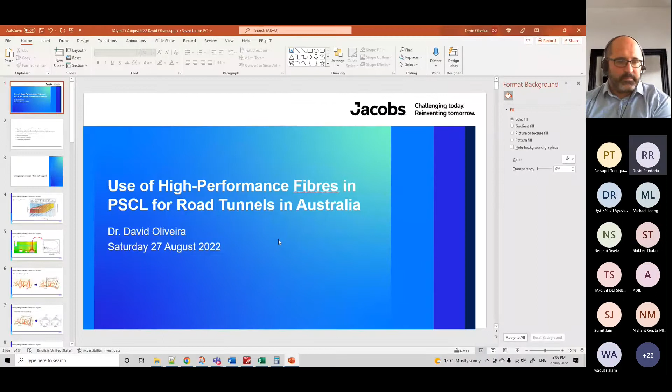So I'll just start sharing my screen here. Sure. Can everybody see the presentation? Can you confirm to me, Ruchi? Yes, it's visible. Just a small quick announcement. If anyone has any doubts or queries, kindly post it on the chat and we'll be addressing it after the webinar. Thank you. Over to you, Doctor. No, thank you very much. If you try to ask something or raise a hand, I might not be able to see because I only have one screen here. So if you hold to the end, I'm more than happy to answer. We should have enough time. I tried to make this presentation maybe only 45 minutes, so we should have another 15 minutes for any questions that you may have.

So when I was invited to present to the young members of the Tunneling Association of India, they asked me, "Can we please, David, try to find something practical, something related to a project?" And I thought I could present something that we have been developing and working on quite a bit in Australia, which is the use of high performance fibers for permanent sprayed concrete linings in road tunnels. In particular in Sydney, we have the practice to use our primary tunnel support as a permanent tunnel lining. So we wanted to develop a high quality product, and we looked at how to improve that with better fibers. What I'm going to show here is a product of research, but it has been applied in practice. I'm going to show how we developed this, and what the results and benefits are.

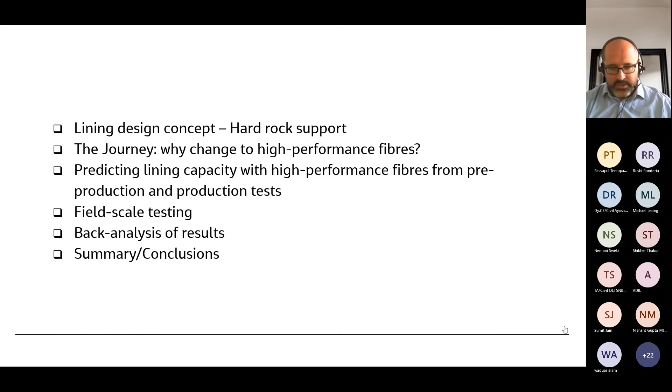So, looking first at the lining design concept, so everybody has a broad idea what we're talking about here. We will assume that the majority of people here have some tunneling background or some understanding, so I'll assume that you have an idea of some of the most basic comments. But if you don't, please just hold your question, put your question, and we'll try to answer at the end. When you talk about the design of shotcrete lining in rock, it's still today one of the most common practices, and maybe more in mining than in civil, but even in civil, to first look at empirical design.

It's a great tool, empirical design, very practical, and a great starting point, right? Here is a graph that most engineers involved in tunneling will be familiar with. It's the Q system support chart. What it tells us is if you have some good mapping and you can identify the quality of your rock by the Q index, depending on your span, you can just find in this chart what would be the practical support applicable for that tunnel, for that span, and for that rock quality.

Just for the sake of an example, let's assume that we have a rock that has a Q value of 0.4, and we are looking at a tunnel where, when I apply the ESR, which is similar to a factor of safety, say we are looking at a span close to 20 meters, which is quite a large span. But for us in Australia, it's quite a common span for road tunnels. So if you look here, 0.4 and 20, the bottom chart would be indicating that we would need a shotcrete lining that is probably closer to 150 millimeters or 15 centimeters, okay? And this would be required with a rock bolt spacing of 1.5. So that's an initial guidance.

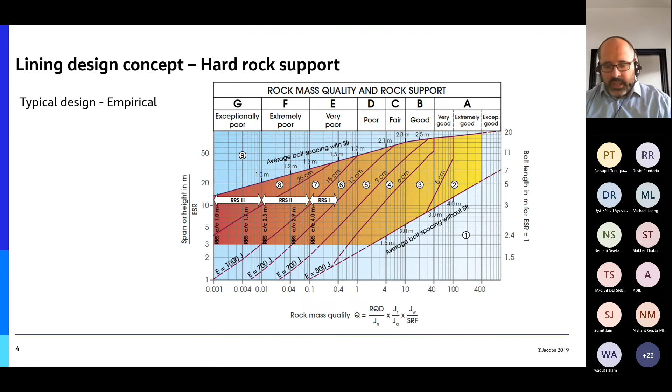So it's a good starting point, but generally it's not a method that's acceptable on its own. Great starting point, great guidance, but typically on its own it is not something that's acceptable. We still need to demonstrate from engineering principles how we design this lining. But sometimes, particularly in mining, this is the only design that's done. We want to develop that further, and we have moved a long way. So the second most common approach is to do numerical modeling, right?

With numerical modeling, you can obviously bring in some of these code aspects. So you can do a numerical analysis here. For example, this is an analysis where we have 2 tunnels beside a cavern, a quite large cavern. When you analyze these, you can extract the information from your model on how the shotcrete has been loaded, right? You extract the axial forces and the bending moments, and you can plot them in a chart where you apply your local standards, reduction factors, and load factors, and you see if your loads are within the capacity of your shotcrete or your sprayed concrete.

For example, here we see that there would be minor points exceeding the plain shotcrete curve, but it's all inside the capacity of a fiber reinforced shotcrete. So in principle this would satisfy code requirements, because you'll be applying reduction factors and load factors that will be defined in your code. And from these, you can also extrapolate other structural requirements. The disadvantage here is that

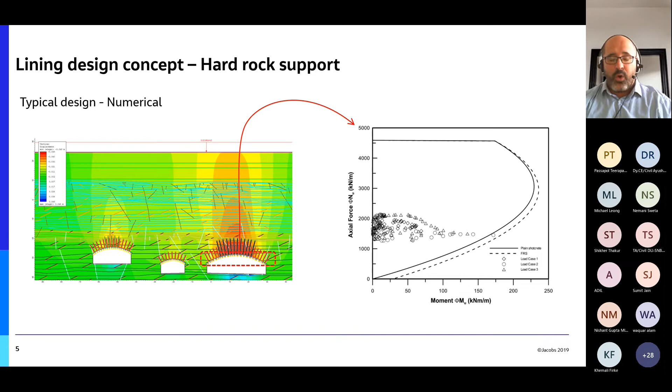I want to develop now a simple model that represents how the shotcrete performs in a tunnel, in a hard rock tunnel, where the shotcrete is supported or it works in combination with rock bolts. So let's move on and have a look at what it means.

So when we think about hard rock tunnel support, the first question that we have to ask ourselves for any support development is, what are we designing against? What are the failure mechanisms that I want to look at? There might be many, but we will look here at the failure mechanism of the shotcrete alone in this particular case.

Okay, so when you're looking at a hard rock tunnel, obviously we are worried about the global stability of the tunnel and also the stability of individual rock blocks or rock wedges that are developed around your opening. So here's an example. If we open a tunnel here, we're only showing a portion of the tunnel, say a portion of the crown or the roof. And if you do nothing, you'd have wedges falling out.

If one wedge falls out, it might actually bring further failures, because you'll be starting to unconfine other wedges that were not originally confined. So for example, here, if wedges F and C fall out of your crown, then you might start destabilizing wedges A and B, which will fall out, and then consequently E and D. And this could actually progress to a larger failure. So you want to make this stable.

How we do this in rock tunneling is, for this type of failure, we would generally add rock bolts, right? So we would be adding rock bolts here that will be tying wedge F back to better rock, and we'll be adding a rock bolt through wedge C, which will be holding it back. Okay, now you could ask me, okay David, we stabilize F and C, right? And we put them at a certain spacing, for example the spacing that was recommended by the Q chart, the Q system support, say 1.5 meters as per my example.

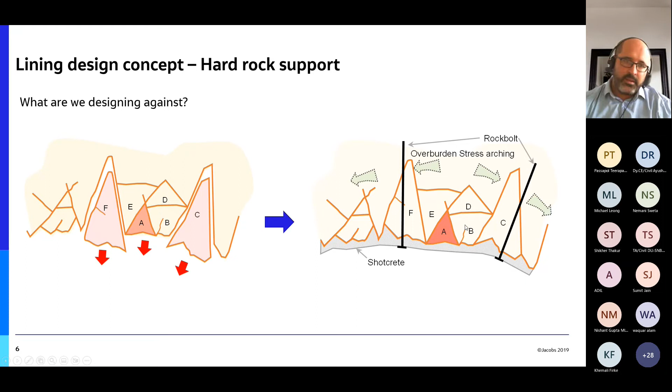So if we move along now, okay, now I know what I have to design for, but how do we design against this? And we start to look at similarities of how this system is working. If we think here that this system looks very similar to a slab on columns, so essentially I have here rock bolts that work as concrete columns, like in a building, right? And I have a shotcrete here that works like a slab in a building. So it's just upside down in comparison to this side here.

When we look at how to design against this, we can use simplified methods, right? And one of the simplest methods that's actually present in many structural codes is what we call the direct design method. The direct design method is very simple. Actually, if I go back here, it assumes that this slab, or the shotcrete between the bolts, is simply supported on both ends. So you can calculate it as a simply supported beam. But recognizing that it's not really simply supported, it is continuous.

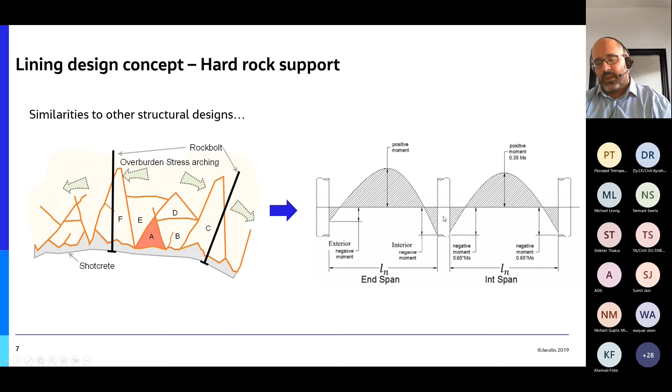And this method was very simply addressed and presented in a paper that we use very often here for design, which was presented by Barrett and McCreath. This paper was published in 1995. I forgot to put the reference here, but I'm more than happy, if anyone later wants to contact me to know what the reference is, to provide it. It's a very simple paper, and that paper focuses on this simple design method, the direct design method, and then highlights, for shotcrete in particular, that there are 4 failure mechanisms that we need to address and satisfy, right?

So the first failure mechanism is adhesion. When we spray shotcrete or spray concrete, obviously we want it to adhere to the rock, to bond to the rock, right? And we typically want that bond to be strong enough to not fail. So the first failure mechanism is adhesion. If the shotcrete is well adhered, well bonded to the rock, the next possible failure mechanism is direct shear. So if you have a load, it can actually shear off completely, a complete shear failure that shears off the lining, just like this picture here.

So there's a direct shear failure, and this is only possible if you have a good bond, if your bond does not fail, right? If your bond fails, then this direct shear is no longer possible, because the shotcrete will be working in a different way. It's no longer bonded here, so it cannot shear. What will happen if this wedge is pushing the slab or the shotcrete down here is that it will be putting your slab in bending, right? So the next two possible failure mechanisms, if adhesion is lost, if bond is lost, are a flexural failure or a punching shear failure near the support, near the rock bolts.

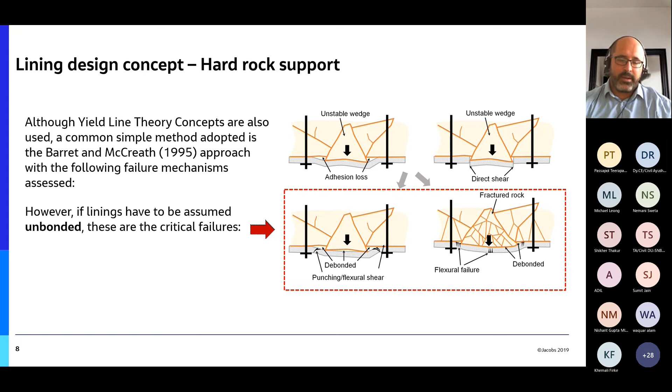And because we work with flexure, flexural capacity and shear, we need to then develop shotcrete mixes and concrete mixes that have good flexural resistance, which is what we're going to move now to understand. So how we understand flexural capacity in shotcrete design, it's what we will very shortly have a look at.

There's only one thing that I want to highlight here, and this is just a preamble, just a bit of a hint to the development and the research that we did here in Australia, how to better design our shotcrete linings. This simple design method, as I said, assumes the lining or the shotcrete as a slab or as a beam that's calculated as simply supported, right? And then there's just a translation of the bending moments to account for the continuity. So it's essentially relying on a pure bending capacity, just like we do with beams.

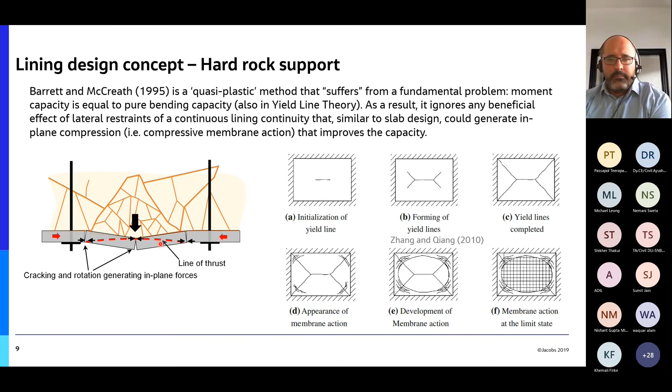So as I was mentioning before, obviously, if we are relying on the shotcrete here as having structural capacity in bending, we need to satisfy that it can take that deformation. When we think about how the shotcrete is working here with this load coming from wedge A applied to the slab here, a lot of engineers defend, and I actually fully agree, that the most representative testing that we can do with the shotcrete to represent this condition here is the toughness testing, right?

There's only one problem with this test, although it represents really well, and it's typically done with thicknesses that are of similar order of magnitude to the linings that we use. So for example, this panel here is tested with a 75 millimeter panel, and thicknesses in shotcrete for rock typically will be in that order. For example, the Norwegians established a minimum thickness of 80 millimeters, so you'll be working with 80, 100, maximum 150.

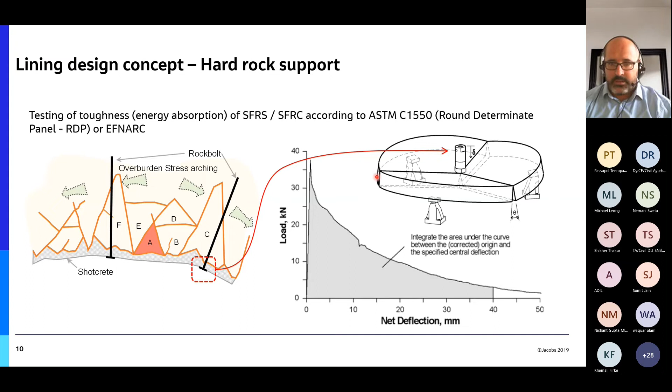There are methods to convert the test results from the round panels to an equivalent flexural resistance, right? Which is the next topic we're going to be discussing. So this is based on conservation of energy again and using yield line theory. So these are some equations. I'm not going to go into details here, but there are ways of calculating.

Why? Because we can, based on conservation of energy here and yield line theory here, establish the way that the panel fails, and we know that round panels always fail this way. It always fails with 3 cracks, right? We can actually calculate an equivalent flexural resistance for a specific crack width that we have to design for. And this is how we can actually connect the results of a round panel to the results of another testing, which is the next one we're going to show, the beam testing.

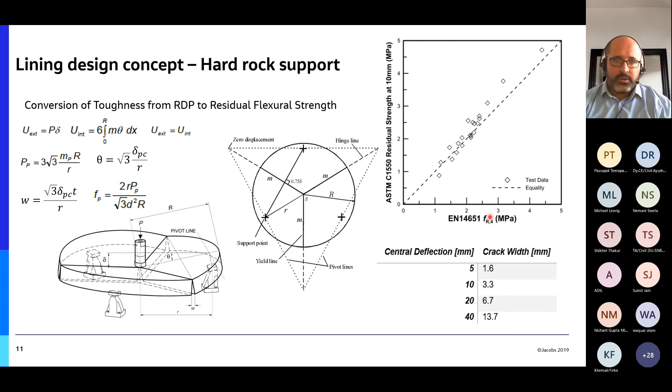So as I mentioned, the test that gives you the direct value of flexural resistance is this beam test. Right? And this is a test that's simple. It's simple to estimate, and that's why it's simple to define a flexural strength of this beam, because it's also determinate, right? And it is a simple beam that, if we are following EN 14651, is a 3-point bending, right? And what we get is a curve that is load versus crack mouth opening displacement. So how much the crack opens at this location here.

And so this gives the straightaway residual flexural strength, which is a strength that's then described in most, if not all, structural codes. So you can actually use the structural codes and structural guidelines such as RILEM and the fib Model Code 2010. You can apply these values directly, so you are following structural codes, and you'll be satisfying compliance to those codes when you're using this test.

So this test gives you five thresholds, right? The first one is what we call the limit of proportionality. It says when you load the sample and you exceed the elastic capacity of the concrete and it cracks. So it's essentially the first crack opening. Then you have different values of the capacity at different crack widths, right? So we have at the crack width of 0.5, 1.5, 2.5, and 3.5. And these are called different names when you get the results.

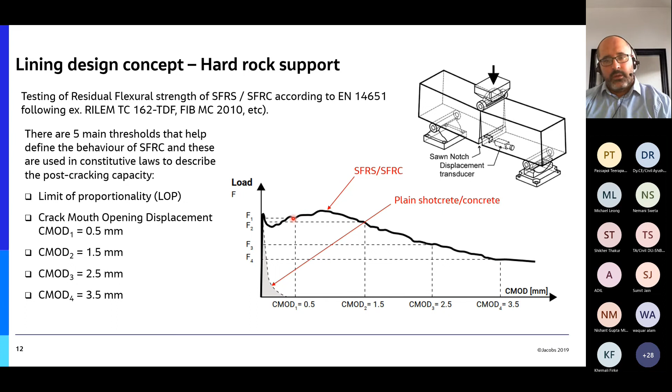Okay, now that we had a brief introduction to the concepts behind it, let's understand the challenges and some of the issues that we face and what we have learned in the process. The first thing is obviously to try to understand what values we want to achieve with our shotcrete. So we can compare, although they are not directly related, the results of the toughness or the energy absorption testing with beams, right?

So a lot of the guidance is towards toughness when it comes to rock support or tunnel support, because there's a lot of experience in the mining space, and it is more typical in the mining industry to be specifying shotcrete in terms of toughness rather than in terms of residual flexural strength. So generally, when you are in a tunnel where you expect low deformation, you don't need great energy absorption. The deformation is small, you don't need to absorb a lot of energy. So this is a very typical value adopted in mines here in Australia.

You typically work with 280 joules, which is a measure of energy, at 40 millimeters deflection using the round determinate panel. If you're in moderate ground, where you expect moderate deformations, it is about 360. And when you start getting higher deformation, typically 450 or higher. Okay, so this is for areas of high deformation, sort of towards squeezing ground or towards higher stresses. So you typically work like this. In fair to good quality rock in shallow conditions, generally you don't need to go that high. You would typically be working towards this 280 or even 360 maximum.

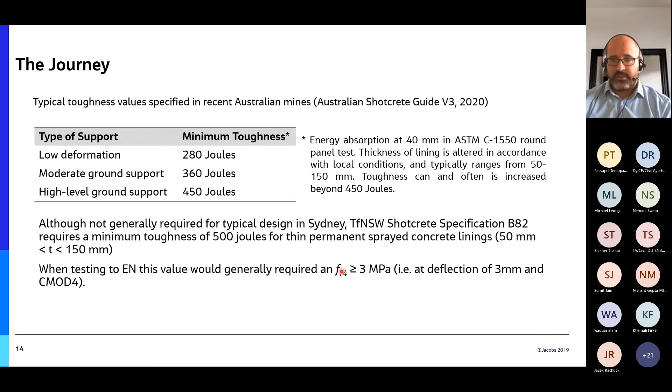So at about 2014, 15, there was the start of a big tunneling boom in Australia. We're still going through it. There's a lot of tunnel projects going on, but it started at about 2014, 2015, and this is where we started also having to try to follow these 500 joules, and as a result of that, we were targeting that 3 MPa. And I'm going to show you what happened when we specified shotcrete that had to satisfy a residual flexural strength FR4 of 3 MPa.

So we used a very good fiber. It is by no means a poor fiber, which was an end hook fiber, which had a relatively high strength of 1,345 MPa. This end hook fiber here, and we used dosages that are very reasonable. Say we started with 35, but we went from 35 to 40, even 45. And what we're going to be seeing here is that even with this dosage of 40 here, for example, and we even tested 45 too, we could, as an average, achieve the 3 MPa flexural strength for FR4, which is that CMOD 4 here, as an average, right?

But as most structural engineers will know, we can't be designing for average values, right? We want to achieve characteristic values where we have 95% of our results exceeding the value that we specify. And there was a lot of work. As I said, we went all the way up to 40 here, and with this fiber we wouldn't achieve it. There were 2 projects that used this fiber in a row, and we just couldn't achieve it. That meant that we couldn't take the benefit of reducing thickness, for example, because we could no longer rely on a residual flexural strength of 3 MPa that we wanted.

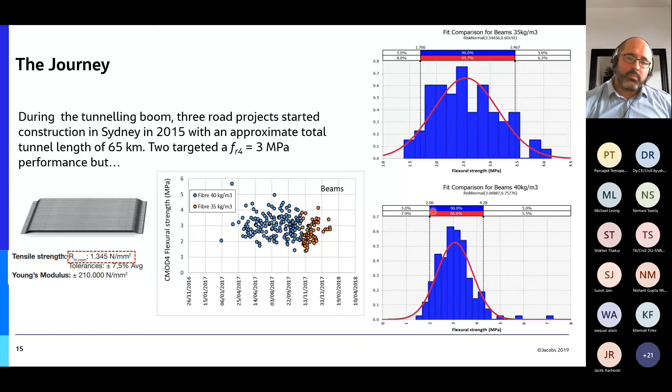So what we did in the next project, just highlighting here what happens: besides a number of non-conformances that we had to address in the follow-on project, there was also this change in requirements that we could no longer rely on adhesion. The previous reliance on adhesion also helped us, because if we could rely on adhesion, flexural failure is not a possible mechanism. So this changed in the process of these initial projects.

And there was also another requirement that, again, is not even discussed, for example, in the empirical design by Barton: we had to design our thin shotcrete lining for huge fire exposures of 4 hours ISO curve, for those who are familiar with fire design, or even 2 hours hydrocarbon curve.

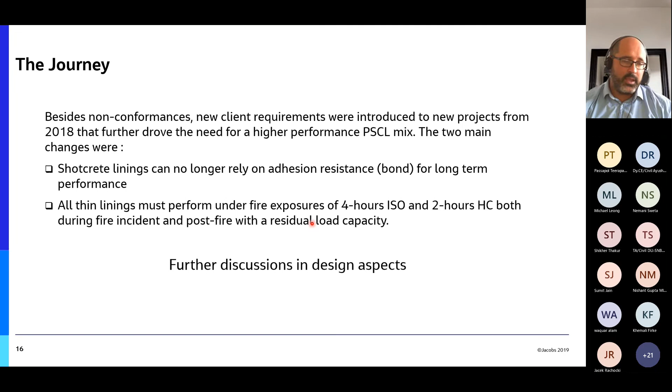So when you add this requirement that we can no longer rely on adhesion, and this requirement to design for fire, it was putting a lot of pressure on our shotcrete design, and we had to make our shotcrete work better in terms of flexural resistance. So we really had to satisfy that 3 MPa that in these first couple of projects we couldn't satisfy, even with a reasonably good fiber. So that's when we started looking at a high performance fiber.

And what is a high performance fiber? You can see that the shape of the end hook has changed. So you have another fold in the end hook here. This provides a better embedment, a better pull-out strength of the individual fibers, and the tensile strength of the fibers also increased significantly. From 1,300 and something that we had before, we went all the way up to 1,850 MPa. So a significant increase in the strength of the steel for these fibers, and a significant improvement in their pull-out performance by having a better

embedment, right? So I have avoided using the commercial term here, obviously, but for example, this fiber is what is called the 4D fiber by Dramix. So it's a high performance fiber, and it was never used in shotcrete before. Common in TBM design and segmental lining, but never used in shotcrete, certainly not in Australia. And we tried to find examples in the world. I think we heard that it has been used, but certainly in Australia it had never been used before in shotcrete. And we decided, well, let's give it a go. Let's adopt this, and it's more expensive.

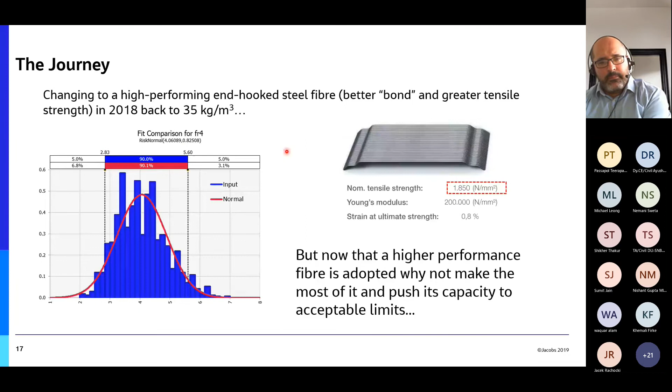So now that we managed to achieve the target that we wanted, this close to the 3 MPa that I mentioned before, we wanted to investigate: okay, now I can already make the lining thinner, but how can I make it even thinner? Or not even thinner, how can I make it work now with this extra requirement, for example, for fire and for not relying on adhesion? And we started investigating that aspect that I mentioned to you all before, the compression membrane action. How the lining, when deforming, will generate internal in-plane compression that will bring the bending, the flexural capacity up.

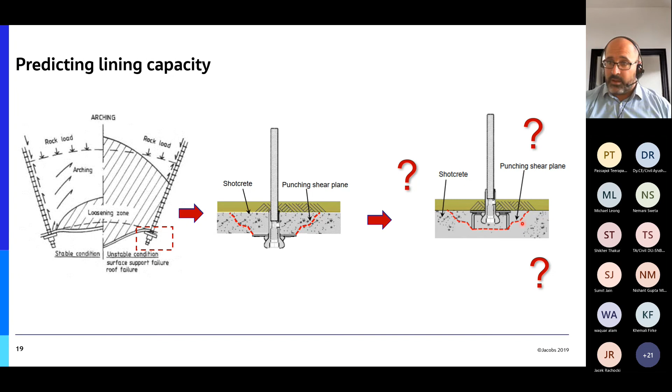So we wanted to test the capacity of our shotcrete lining. We had to understand the capacity of this system here first. So we actually did some field tests where we simulate the pullout of the rock bolts, which is similar to the inverse of those round panel testing, right? So we sprayed big concrete blocks, like you can see here, the formwork with the rock bolt inside, representing the rock bolt in the tunnel, and we shotcrete this in place. So this is shotcreted. It's not just concrete pour, it's shotcreted.

And what we do is we turn it upside down, and we put a hydraulic jack, and we load it up to try to pull it out. So there's a pullout capacity of this shotcrete here. And we can understand what the capacity is, we can develop curves. I make this joke, it's like an Excalibur test. It's like someone trying to remove the Excalibur sword from King Arthur from the rock here. So that's the test we are doing.

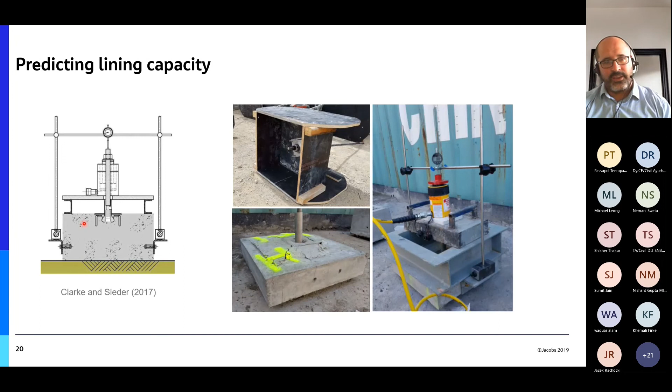We generate a number of tests here. There's just some of the results, only about 1, 2, 3, 4, 5 results, but we had more with different types of plates, with different configurations, and so on. And we identified that the maximum load that one individual plate like this could take would be in the order of about 80 kilonewtons. Okay, and we also back analyzed these with numerical modeling to understand the failure mechanism as well.

One interesting thing we noticed, we tested rock bolt plates that had this handlebar, and you can see the handlebars a bit better in this picture. And we tested also rock bolt plates without this handlebar to see what was the benefit of the handlebar. And what we noticed, and we also confirmed with the numerical analysis, is that the majority of the capacity for the rock bolt type that we are using wasn't coming from the handlebar, it was coming from the shotcrete encapsulation around this hemispherical dome of this head here, right?

Both the rock bolt plates with and without the handlebar achieve the same peak capacity, but the main difference is that once the shotcrete failed, the rock bolt plate with the handlebar had ductility to keep continuing loading without too much significant drop, while the one without handlebar would achieve a peak capacity here and would immediately drop, right? So we investigated that the capacity is actually coming from the head pullouts, but the importance of the handlebar in this particular case here was to provide ductility. And we confirmed this with numerical modeling.

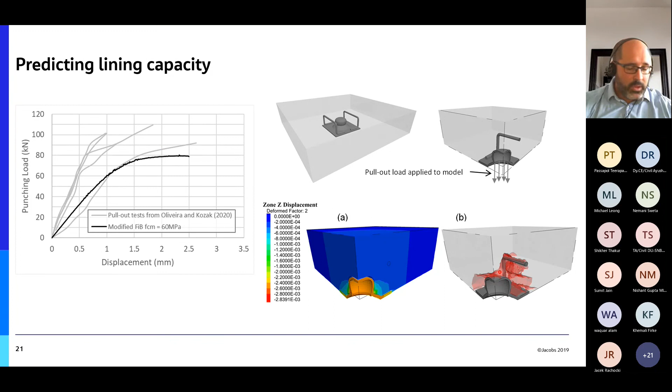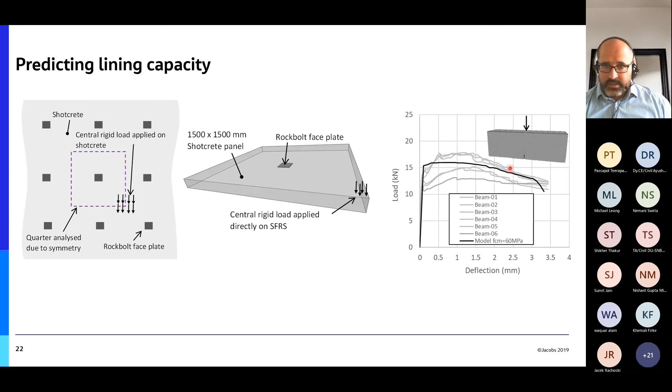To do this numerical model, we calibrated the performance of our shotcrete against beam testing. So you can see here, we did this calibration, and we investigated what the capacity of our lining would be. So we estimated the capacity of our lining when taking advantage of compression membrane action would be about 280 kilonewtons of the shotcrete if there's no punching failure, while that simple design method, the Barrett-McCreath, for example, was only predicting about 60 or 70, right?

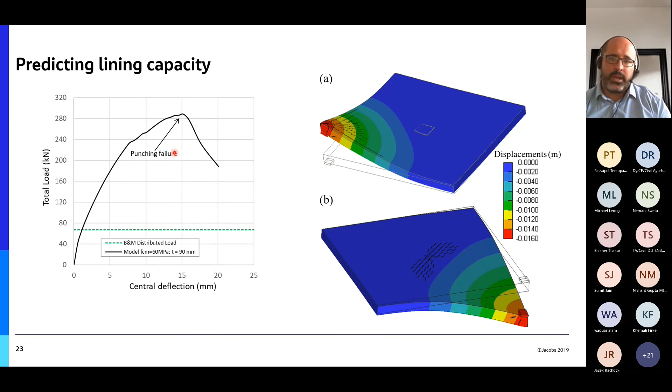So when taking compression membrane action, we were observing an increase of about 5 to 6 times the capacity, and we wanted to take advantage of this. So numerically and based on simple testing, we proved that we had a high capacity because of membrane action. So our next step was to do field scale testing to prove that in the field we can also achieve this when we combine with the high performance fibers.

So what we did, we created a test in the field where we would shotcrete a wall, and we would put a loading system behind the shotcrete. So we created a slot in the rock. It's just hydraulic pressure bags, those bags that sometimes are used to lift heavy equipment, or even to lift debris, for example, in an accident, or even to open cars that have crashed. If you have seen those types of hydraulic pressure bags.

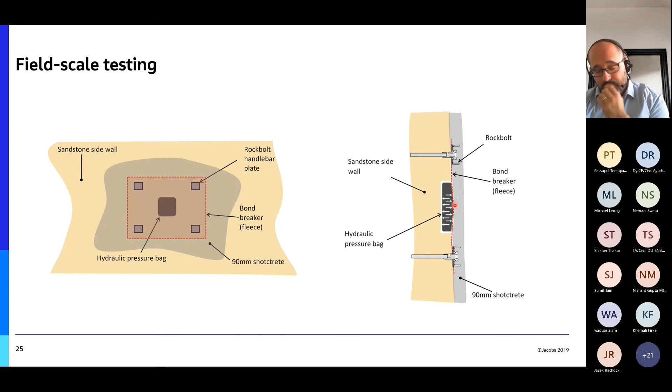So we put them behind the shotcrete here. We force the shotcrete to be debonded from the rock here. So we put a fleece that makes it debonded, so it has to fail in flexure or punching. And then we load it, right? So some pictures of the testing here. So here's the fleece, the geotextile, forcing the shotcrete to be debonded.

The pressure bag slotted into the rock here. So you can see a hose that goes up here. This hose is seen here as well. Then we shotcrete this whole face here. We had a few panels for this testing. We loaded and we checked the crack pattern, and we had a load system here which could measure the deflection of the shotcrete here, so we could actually create a load deflection curve of this field scale test here.

And why was it about 320 kilonewtons? Because this is the capacity of 4 rock bolt plates, right? So remember that our rock bolt plates pull out had only 80. So if you do 80 times 4, that's why we were only achieving that 320. So we proved that our shotcrete was not the weakest point, right? So we could make it as thin as possible because the weakest point was the rock bolt plates.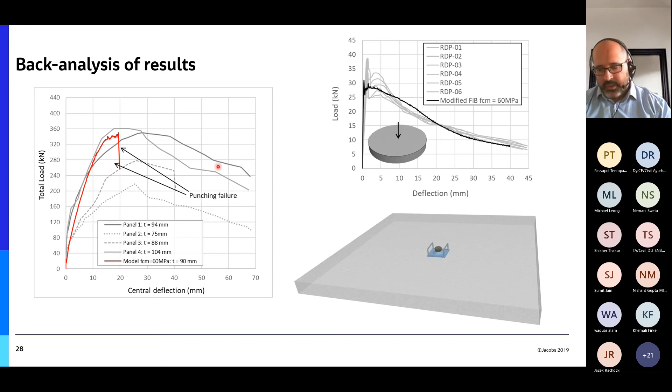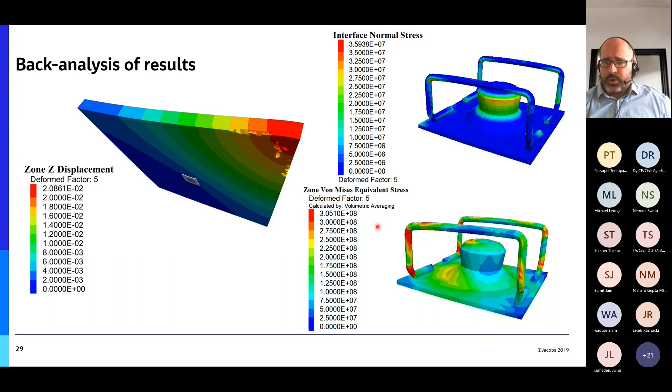And we confirmed that all the failure by numerical analysis was indeed happening through the rock bolt plates here. So we checked that the plates were failing. The likelihood is that our rock bolts were yielding and stretching, and that's why we achieved that capacity.

So just to conclude then, the use of high performance end hook fibers was very effective in achieving high performance ground support here in Sydney. It has now become the go-to mix design using these high performance fibers. We are using round panel testing. We're consistently exceeding 500 joules of capacity, and also consistently achieving the residual flexure strength of approximately 3 MPa for the dosage of fibers we adopted, which is only 35 kilos. Obviously, production testing has only minor outliers, which is that 5% we typically expect.

So these elements needed an embedment that was close to 90 millimeters, so they needed a little bit extra at the back to satisfy that embedment. So the thickness ended up being increased for practical reasons, but from a structural point of view, 90 millimeters would be sufficient. And this was assuming that the lining is unbonded, and it was demonstrated that this capacity was achieved both by numerical modeling and large scale testing, and also field scale testing.

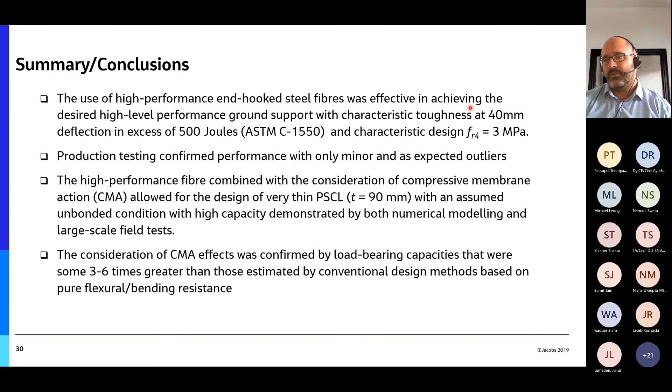There was obviously economical savings because we managed to reduce the thickness, and even though the fibers are more expensive, we managed to use less fiber, but more consistently achieve the results that we wanted. So I think that's it, what I had to say.